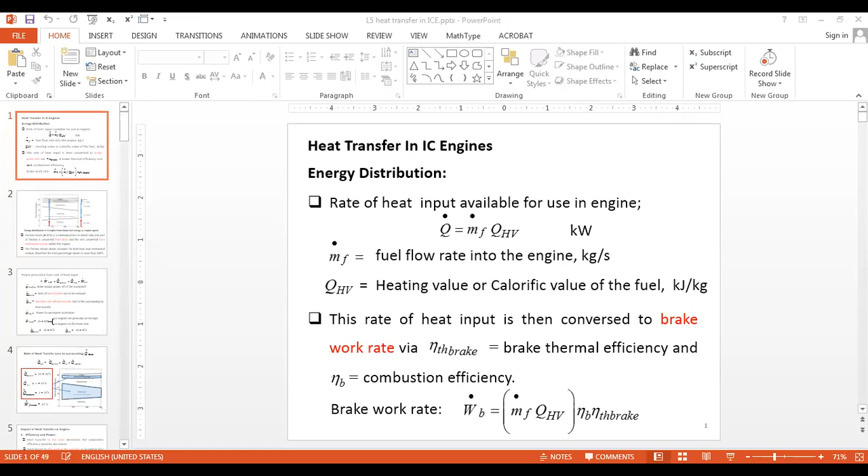Okay, so we start the recording. Today we are going to talk about heat transfer in internal combustion engines. We already talked about combustion and the cycles, so in terms of improving the efficiency or performance of the engines, we have to find out how and where the heat is transferred throughout the engine.

Let's first look at the energy distributions. The input comes from the heat - the amount of heat available for use in the engine comes from the mass flow rate of the fuel times the heating value or calorific value of the fuel. This is the amount of input heat, and this heat will be distributed throughout the internal combustion engine.

The first thing is this heat will convert into the brake work rate or brake output rate, using the brake thermal efficiency. So the first amount goes to the brake work rate. How do we know? We know it from the brake thermal efficiency and also the combustion efficiency.

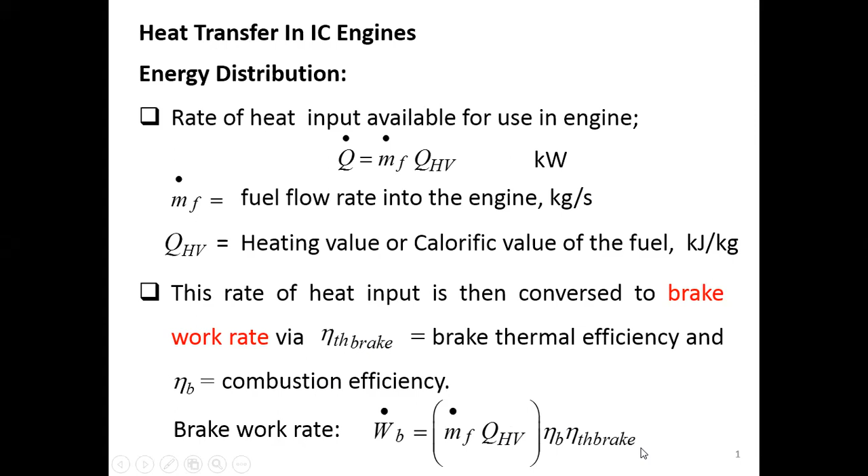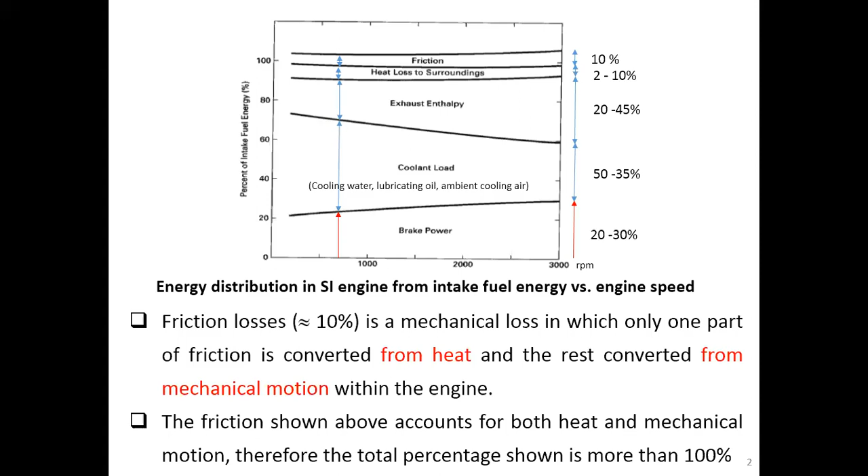And also we have the power, we have to contribute some of the power to run the engine accessories. So if we look at this kind of picture, the shaft work that we receive will be 25 to 40%, in which for the CI engine, the number goes usually high. For the SI engine, it usually goes on the lower end. For the exhaust, it's going to be about 20 to 45%, and to the surroundings, about 10 to 35%.

Let's look in more detail about the rate of heat transfer loss to the surrounding. We have the coolant loss, because later on it has to go out to the surrounding. We have the lubrication oil, the heat that transfers to the lubrication oil or the engine oil, which later on goes to the surrounding. We also have the ambient heat that directly goes to the surrounding at the beginning. So these are considered all the losses here.

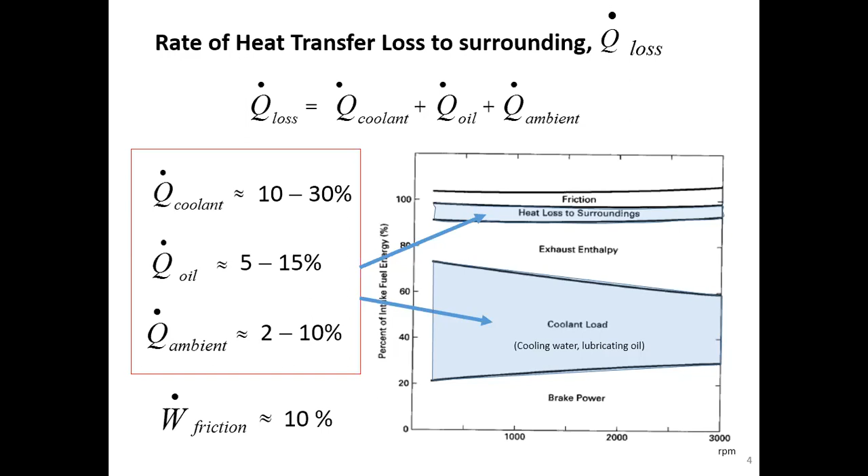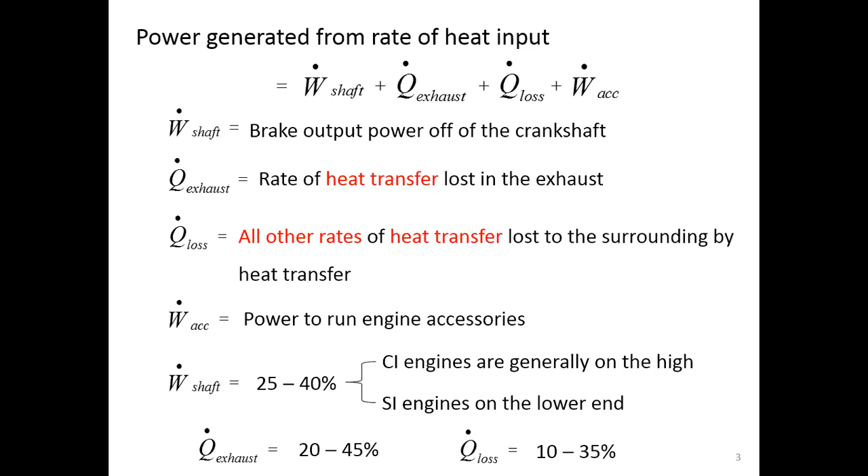This is what they mean by this definition, by these expressions. If they want to take into account all of the heat that transfers to the coolant, to the surrounding, to the exhaust, all of this is considered to be the heat that we cannot use. It has to be taken out from the engine, so we can call it overall the heat loss. So it depends on how you look at it, how the energy is distributed from the heat throughout the internal combustion engine.

Since we have the heat transfer on the engines, let's look at the impact that the heat transfer has on the engine. The first one is the impact on the efficiency and on the power. The heat transfer that happens in the intake manifold, where our mixture flows before it gets into the cylinder, if we happen to have heat transfer in these regions, it will decrease the volumetric efficiency.

Because the heat gets into the intake manifold, flows into the intake manifold, so the mixture receives the heat. What happens to the mixture? The density of the mixture decreases. And when the density decreases, it means the volume gets bigger. So with the same amount of mass, it occupies more volume because the density decreases. So this is what happens if you have the heat transfer in the intake manifold.

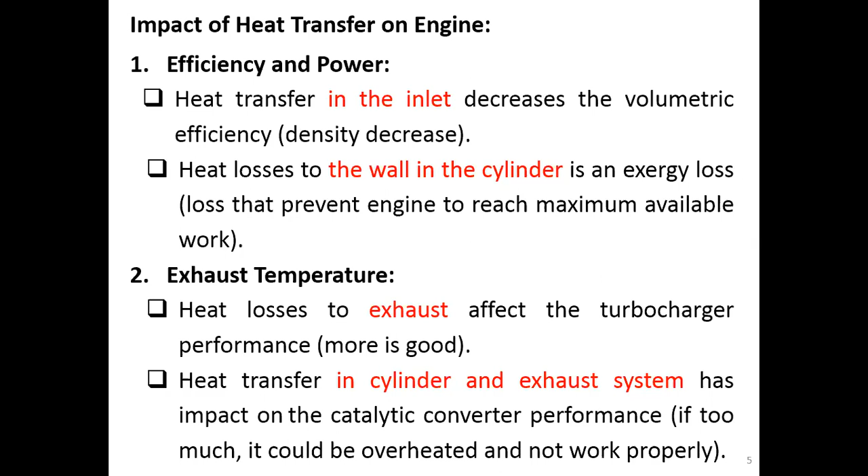Because the performance of the turbocharger is better with that heat loss to the exhaust. If you have more heat transfer in the cylinders and also in the exhaust system, this will have an impact on the catalytic converter performance. The catalytic converter is the device that reduces emissions from the engine—we'll talk about this more in our next lectures. So if you have higher heat, your catalytic converter performance will be bad because the equipment could be overheated and won't work properly.

So this is the impact on the exhaust. Now, how about the impact on friction?

The heat transfer impact on friction: friction due to heat transfer will govern not only the temperature of the liner. The liner is some coating on the cylinder surface, or it may be a sleeve placed on the cylinder surface—it can be either one. So if friction happens because of heat transfer, it will control the temperature of the liner, the piston and ring, and also the oil.

This is what friction does. And when it controls these, it means it will affect the distortions of the piston and bore, because if the piston has high temperature, it can be deformed—we call this deformation a distortion. When distortion happens, sound and vibration come out because the clearance is changed. So friction controls this.

In other words, since this friction due to heat transfer creates thermal loading, this thermal loading—caused by temperature and by distortions—will indirectly determine the power capacity of the fans that blow cool air to cool down the engine. It affects the oil cooler, the power used for the water cooler, and also the pump. So this thermal loading from friction due to heat transfer affects the power of this equipment.

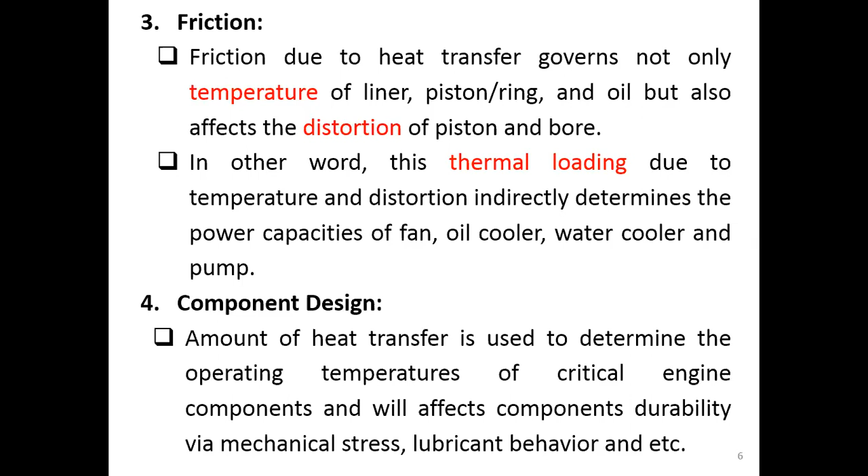Heat transfer also has an impact on mixture preparation in the SI engine, because in the SI engine we mix air and fuel together first. This amount of heat transfer to the fuel will significantly affect fuel evaporation, giving the fuel the ability to mix with air. The amount of heat transfer will also affect cold start calibrations due to cold mixture.

If we have heat transfer go out from the mixture, especially during winter seasons where the outside temperature is lower, our mixture falls in and loses its heat to the surroundings because the surrounding temperature is lower. So this cold mixture, when it falls into the cylinder, is going to affect the start of the engine. So we have to do calibrations that consider this amount of heat transfer when we operate the engine in winter seasons. And then we have to do another calibration when we operate the same engine in the hot season, because the direction of heat transfer is changed between the surrounding and our mixture. So this will affect the mixture preparation for the SI engine.

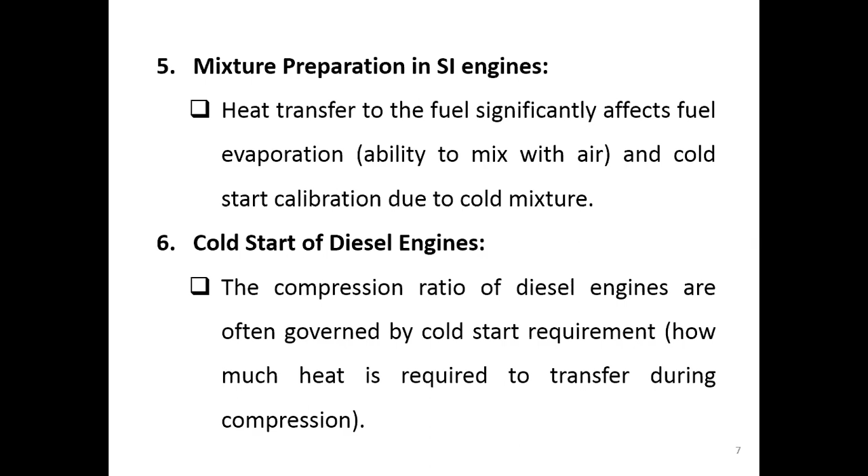Number 7, heat transfer impact on the SI engine octane requirement. The heat transfer will influence the inlet temperature of the air mixture - if it goes in, your inlet air temperature goes up; if it goes out, your inlet air temperature goes down. So it affects this. It also affects the temperature of the combustion chamber, the cylinder head, the liner, the piston, and the valve.

Since it influences all of this, it determines the value of the exhaust gas temperature. Because if the heat transfer goes to this or that, not concentrated on the combustion, the exhaust gas temperature will change. And this will affect the knock, because if you have heat transfer out, less knock might happen. But if you have less heat transfer out, you keep much of the heat in, and if it's too much, your engine can knock from that much heat transfer.

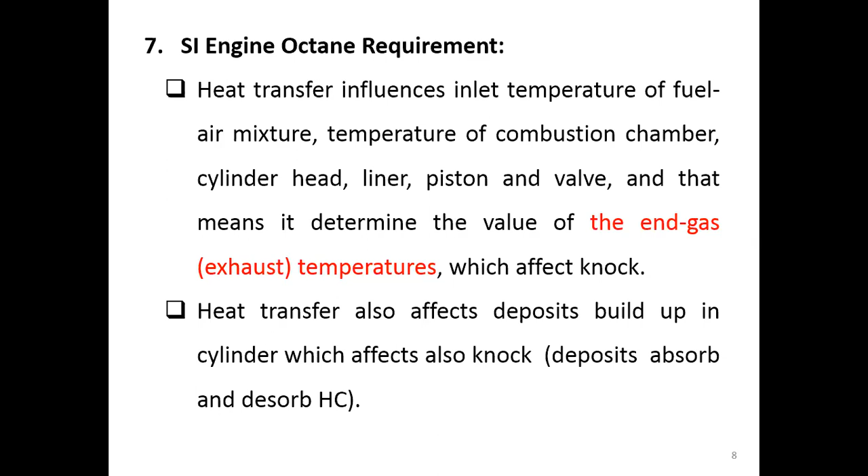So in conclusion, we have mentioned the impact of heat transfer on engines in several aspects. In conclusion, heat transfer is considered to be a very serious problem, and it is something that we cannot avoid. We have to face it.

It happens always, right? Because we need a high temperature to combust the fuel. Our need for high temperature forces us to have heat transfer that we cannot avoid. And also because we want to keep the temperatures at a controllable level in order to operate the engine safely, we cannot have zero heat transfer, and on the other side, we cannot have too much heat transfer. So the amount of heat transfer has to be controlled for the sake of engine operations.

That is why it's important for an engine to have a heat removal process. We have to have a heat removal process even though we want high temperatures, we want to keep the temperatures, so we have to have the heat removal process to maintain the engine at a safe operating condition.

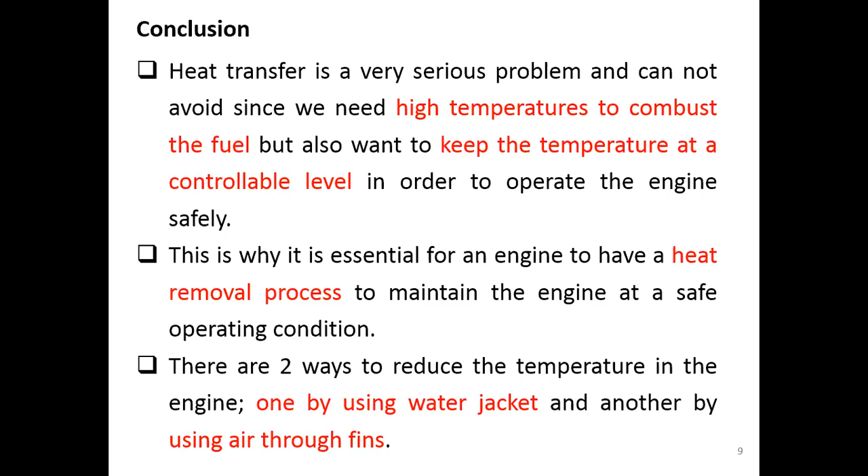Since we deal a lot with heat transfer, and we know how heat transfer impacts our engines, that forces us to study about the heat transfer. So to study the heat transfer, we need to know the heat load characteristics. This is very important. We need to know how our heat load behaves.

The first thing we know is the heat load in the cylinder is very pulsating, that means it's always fluctuating, it never is steady, it's always up and down. Because of what? Because of the temperature difference between the combustion gases and the cylinder wall. Not only because it's different, but also because the magnitude of the difference can go higher than 2000 Kelvin. So this is the source where our heat load is sometimes unpredictable, it's up and down.

The second characteristic is that for different places in the cylinder, this heat load is also different. So it's not only different because it's up and down, but for different locations it's also different. So we have the heat load vary according to places in the cylinder.

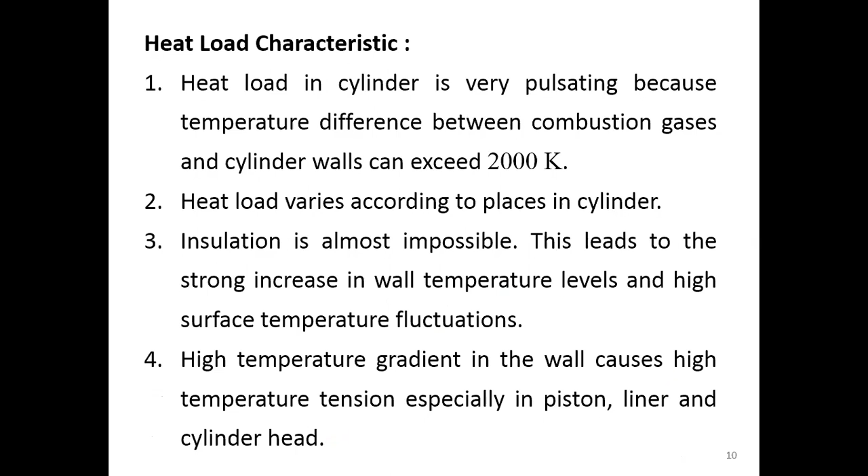Number five, because of this high temperature tension, especially when it happens on the piston, we have this high temperature tension occur in the piston, liner, and cylinder head. Number five talks specifically about the high piston temperature tension. This occurs because the oil temperature for the piston cooling cannot exceed 250 degrees.

We have to allow the piston to have high temperature. Somebody may think, why don't we keep it down? But if we keep it down, the lubrication oil that receives the heat from the piston, its temperature can go higher than 250 degrees Celsius. And what happens if the oil temperature goes higher than 250, trying to make the temperature tension of the piston go low?

What happens is these higher temperatures, above 250, can cause coking of the oil. That means instead of the oil being a fluid, it starts being a solid, or partially the oil becomes solid. So there's no more circulation of the oil. So the oil temperature used for the coolant is limited to 250 degrees Celsius, cannot go higher. So we have to trade off. We cannot make the piston temperature tension go as low as we want, but instead we have to keep it as high as needed so it will not let the oil temperature go up beyond 250 degrees Celsius.

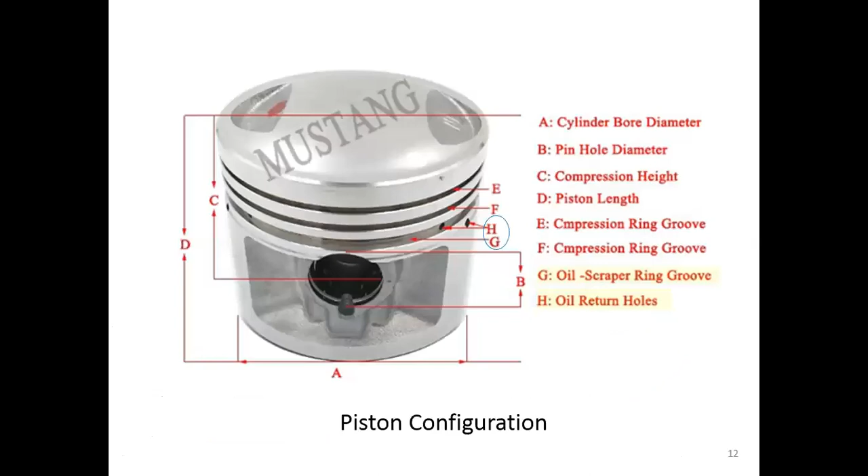Okay, how about the groove? Shown right here. The former one showed the gallery, this one shows the groove. Inside the groove you see the hole, we have two holes here, called the oil return hole. That means the oil, when it gets into the piston, some will go out to the groove using this hole. We also have the oil scraper ring at the bottom of the piston, which is used for scraping the oil to go down. On this side you also see the hole here. So the oil not only comes in and out here, but it also comes out on the groove here, shown like this.

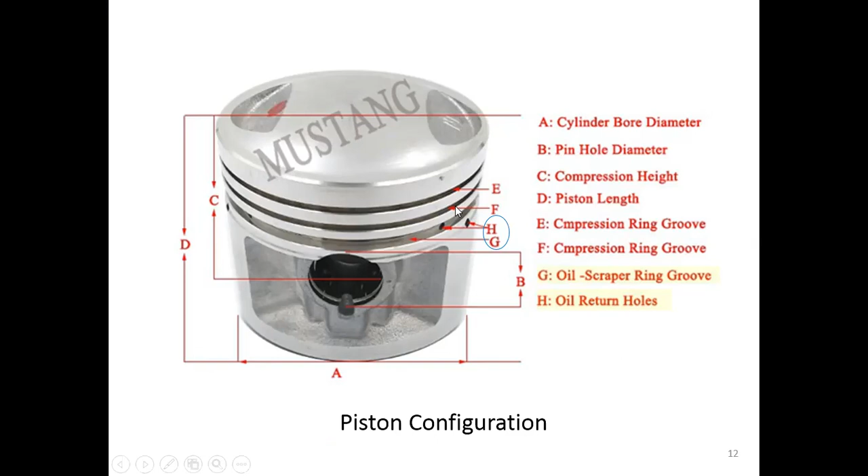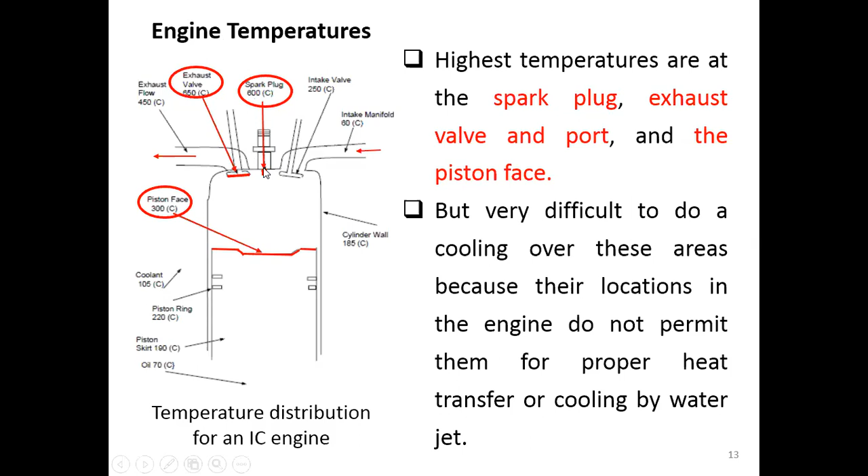Apart from the location problem at all of these places, another problem is time. Time for us to control the heat transfer is also a matter.

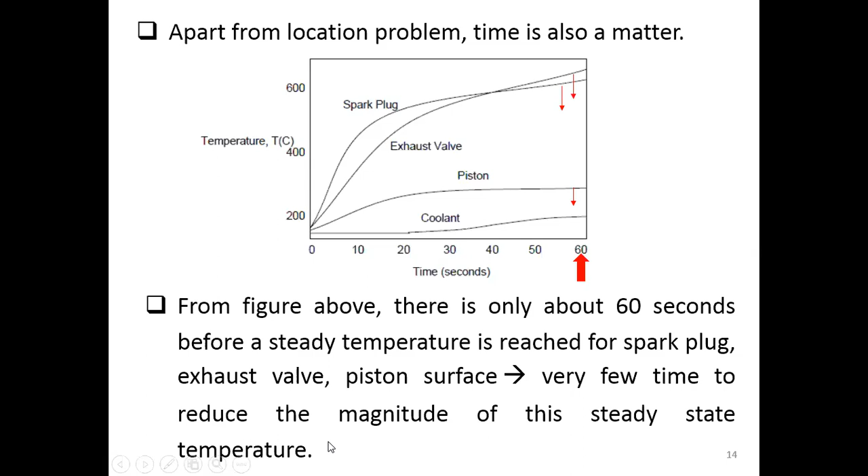So we have very little time to reduce the magnitude of these steady state temperatures, a very short time to do this. So it's a problem - apart from the location problem, we also have the time problem.

Now look at the heat transfer in various locations - the intake system. The intake manifold shows about 60 degrees Celsius in this picture. This temperature is of course higher than the air-fuel mixture temperature, it's hotter than the mixture. Why does the intake manifold have this high temperature? Because it's close to the engine components that are hot, or it's because of the design of the manifold itself, which would make it have a temperature higher than the air-fuel mixture.

So the intake manifold, due to its higher temperature, can help heat the air-fuel mixture, so the mixture can be easily vaporized once it enters the combustion chamber. So here, we intend to have heat transfer from the intake manifold to the air-fuel mixture, so it vaporizes easily and can mix well.

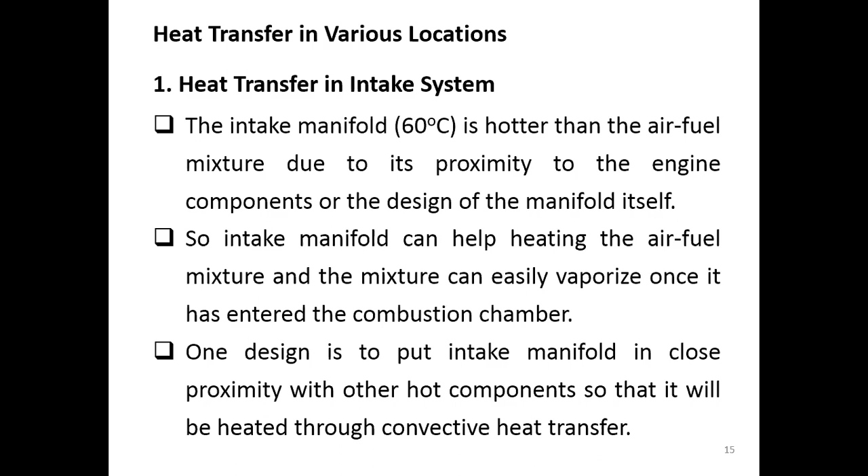So to achieve this, one design is to put the intake manifold in close proximity with other hot components so that it will be heated. The intake manifold itself can be heated through convective heat transfer - just put it close to the hot components and let convection transfer heat to the intake manifold, and then the intake manifold transfers heat to the air-fuel mixture.

Another design is to heat the manifold directly, not only depending on the convective heat transfer mode. This way, they heat the intake manifold directly using electricity or hot coolants. After the manifold is heated, the air fuel mixture that flows into the intake manifold is heated as well through convective heat transfer.

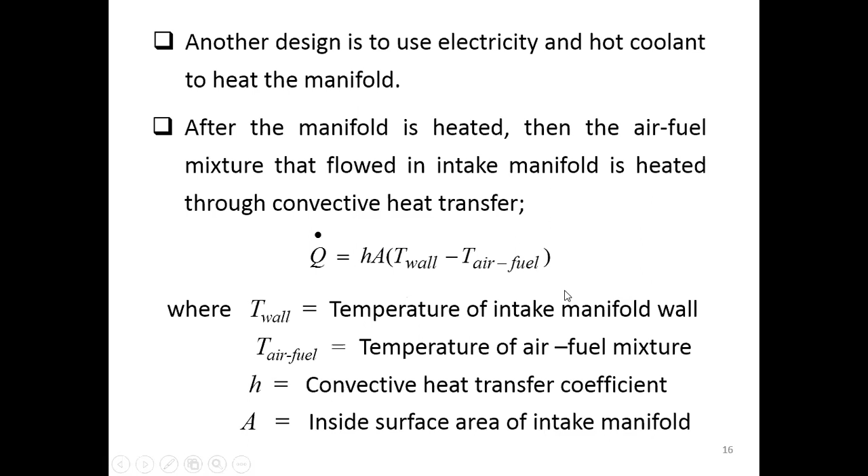The amount of heat transferred can be calculated from this equation. H stands for the convective heat transfer coefficient, A is the surface area—it has to be the inside surface area of the intake manifold. We have the temperature of the wall, meaning the intake manifold wall, and the temperature of the air fuel mixture. So the amount of heat that transfers from the intake manifold to the air fuel mixture can be calculated based on this—it is the convective amount of heat transfer.

As we mentioned, heat helps the fuel to vaporize faster, and since it vaporizes faster, there is more time for the air and fuel to mix together. So it helps provide a homogeneous mixture, which will be ready for combustion in the combustion chamber.

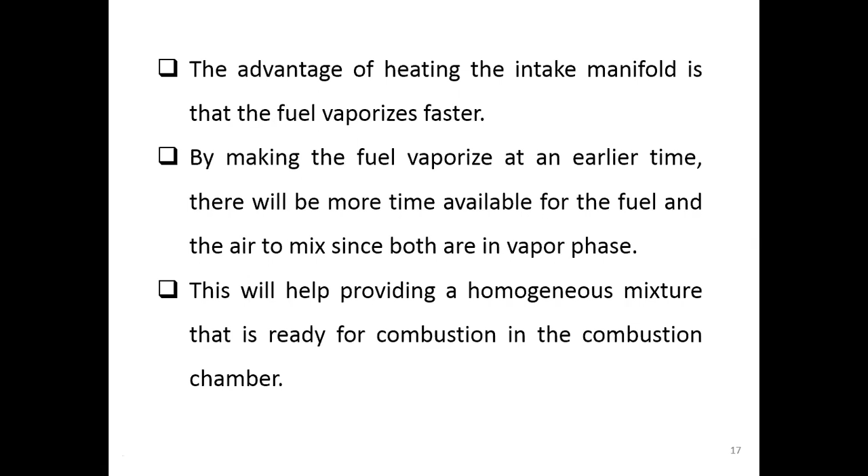The second location is the heat transfer in the combustion chamber. The heat transfer in the combustion chamber or cylinder involves all three modes of heat transfer: conduction, convection, and radiation. All three of these modes play an important role in the heat transfer characteristics for the combustion process.

Let's look at where the heat transfer happens in the combustion chamber. The first one happens during the intake stroke. In the intake stroke, the air fuel mix is cooler than the cylinder wall. The air fuel mixture, when entering the cylinder inside the combustion chamber, is cooler than the cylinder wall, so we have heat transfer from the wall to the mixture.

This heat will help vaporize all the fuel, in addition to the help already provided by the intake manifold. This heat comes out from the wall to vaporize the fuel. Because the fuel vaporization draws heat from the cylinder wall, the wall itself gets what we call evaporative cooling, and this will lower the amount of heat in the compression stroke—the heat due to compression. Some of that heat will transfer out from the mixture to the wall, and in addition, the cylinder wall is also cooled down because there is heat transfer from the wall to the air mixture as the fuel mixture vaporizes.

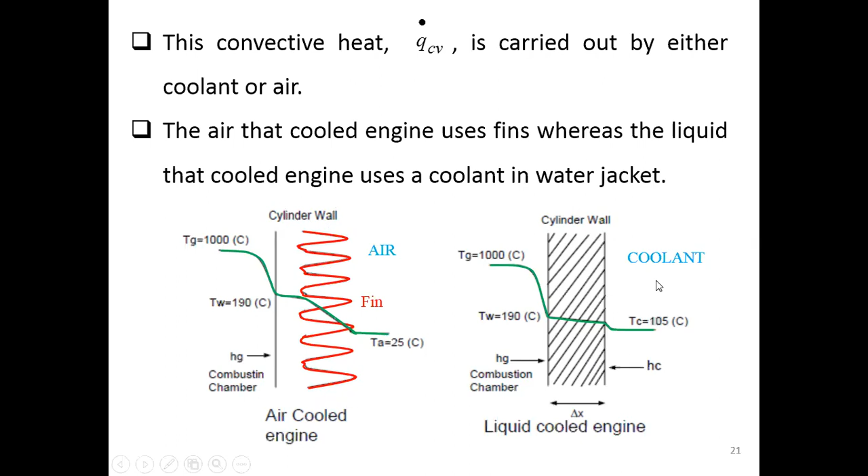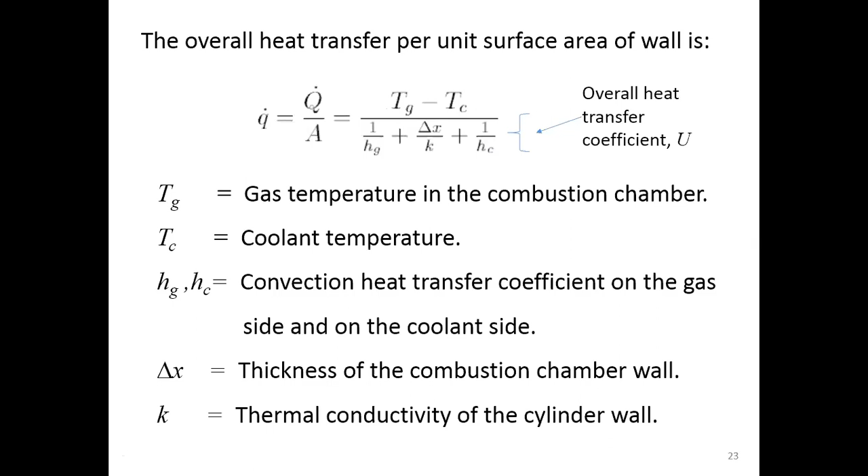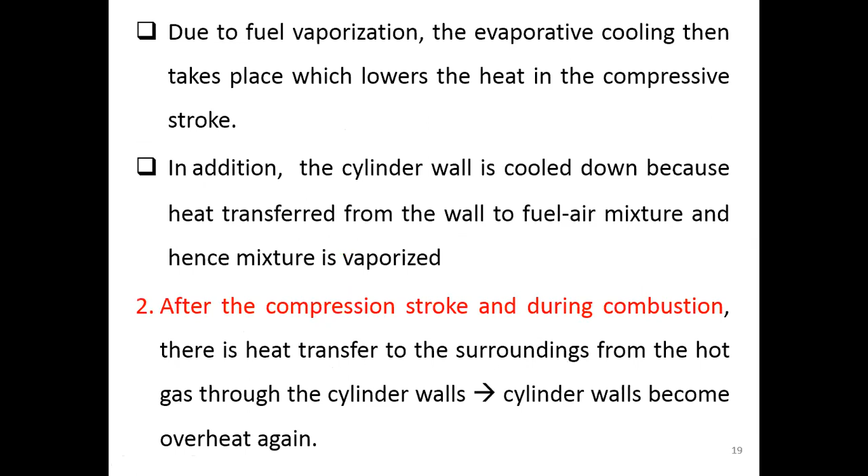So if you want to calculate this, you have to find the temperature of the wall. But if you want the overall heat transfer, you find the temperature of the gas and the temperature of the coolant. You see the difference? You see why we have overall heat transfer? Because with overall heat transfer, you only measure the temperature of the gas and the temperature of the coolant, both falling in and out. But if you don't use overall heat transfer, you have to find the temperature of the wall.

So this wall temperature should not exceed 180 to 200 degrees Celsius. Why do we have to keep this wall temperature within this range? Because we want to make sure our wall has thermal stability, meaning the structural strength of the wall is maintained. This thermal stability also has to happen to the lubrication oil. So that's the reason why the wall temperature should not go over 180 to 200 degrees Celsius. If it's more than this, what happens to our lubrication oil? Remember?

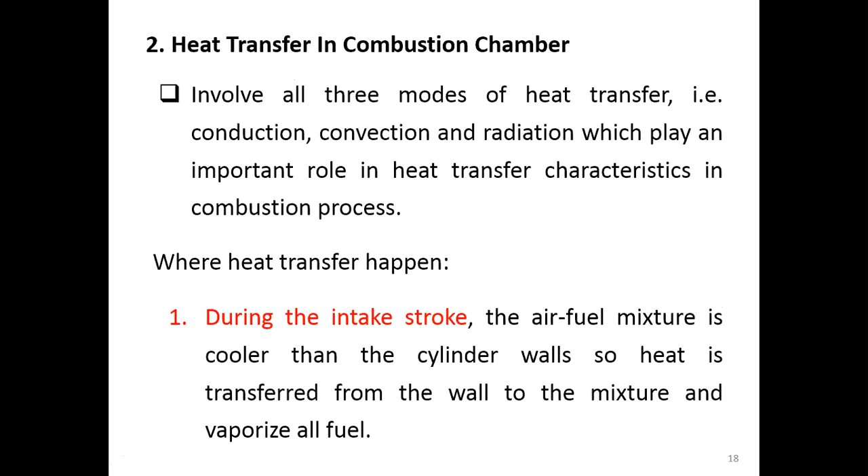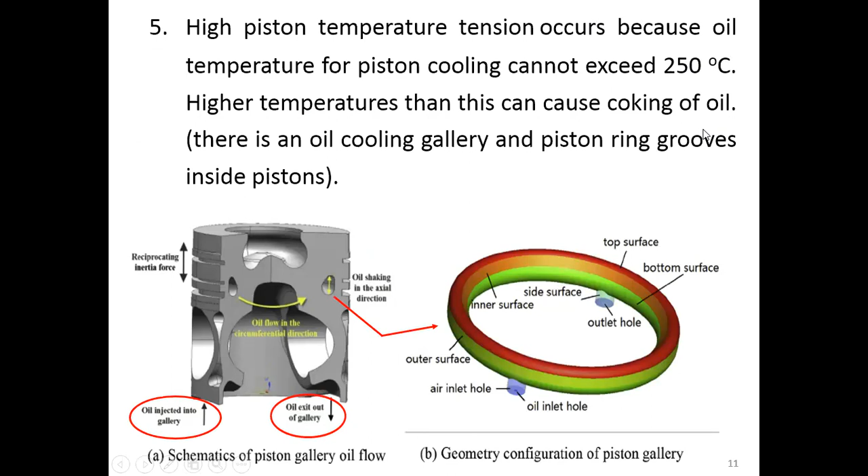250, right? If our oil has a temperature more than 250, it becomes coking. So this is why the wall temperature should be kept within this range.

Since this amount of heat requires calculation of the heat transfer coefficient - the coefficient of heat transfer due to convection - how can we come up with this heat transfer coefficient? We have to make use of the Reynolds number and also the Nusselt number. These two numbers are used for comparing the flow and the heat transfer characteristics. Most of you heard about Reynolds number in fluid mechanics. Now you hear about Nusselt number because it involves the flow of the gas and the heat transfer characteristics. These two numbers help us compare flow and heat transfer characteristics for different sizes, speeds, and geometries of the engine.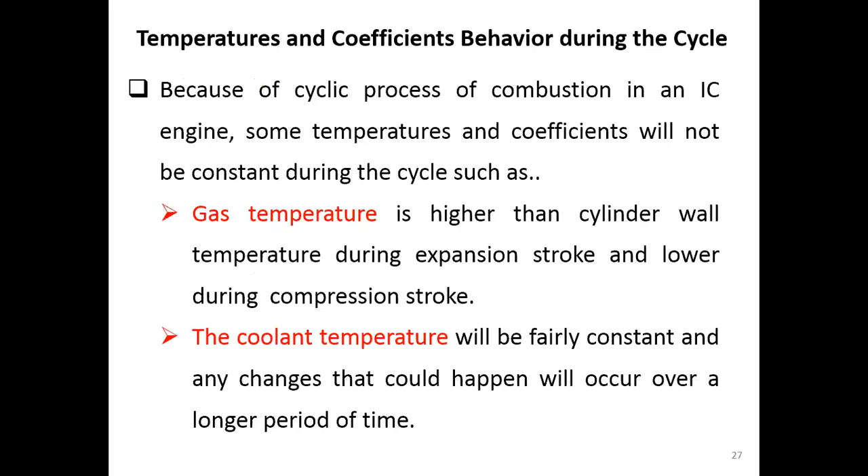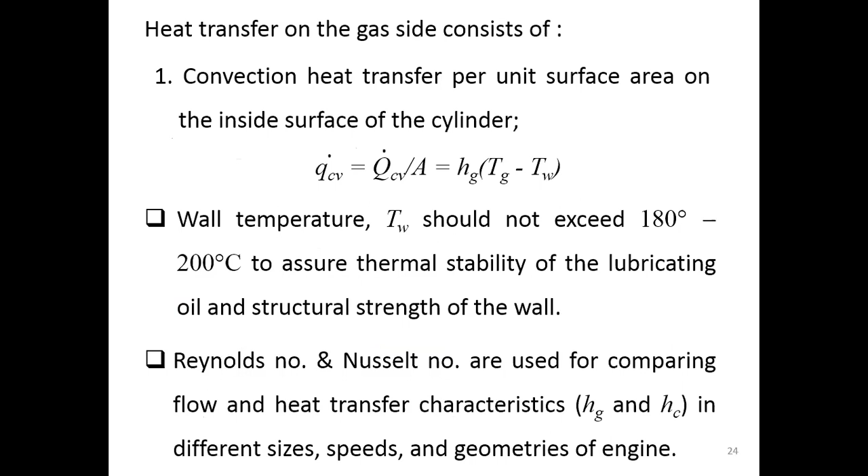Otherwise, we will experience what? Remember, the structural strength of the wall will be loose - we will lose the structural strength of the wall. So we will keep the cylinder wall temperature constant.

So this is the problem we face when we do the heat transfer analysis. One fluid, the gas inside, changes. Another fluid, the coolant outside, is constant. The wall is constant. So the heat transfer has to happen under these conditions. Let's look at how the heat transfer behaves during the cycles - there is heat transfer to and from the cylinder wall throughout the 4 strokes of the combustion process.

We have heat transfer happen during the intake stroke here, the cylinder wall is hotter than the fuel, so vaporization of the fuel happens due to convective heat transfer.

During compression, gas becomes warmer than the cylinder wall, so we have heat transfer throughout the wall here.

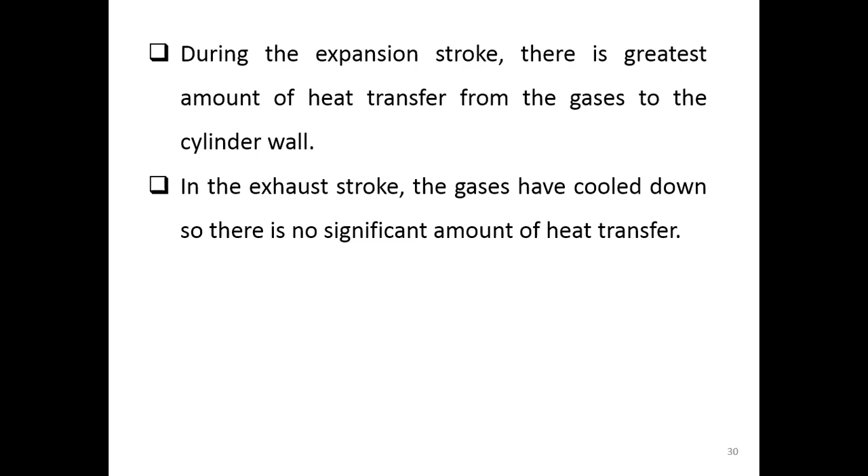During the expansion stroke, there will be a greater amount of heat transfer from the gas to the cylinder wall. In the exhaust stroke, the gas cools down, so there's no significant amount of heat transfer. This is how the heat transfer behaves.

Sometimes we have heat go through the cylinder wall from the gas. Sometimes we have heat from the cylinder wall to the gas. It goes back and forth like this during the cycle.

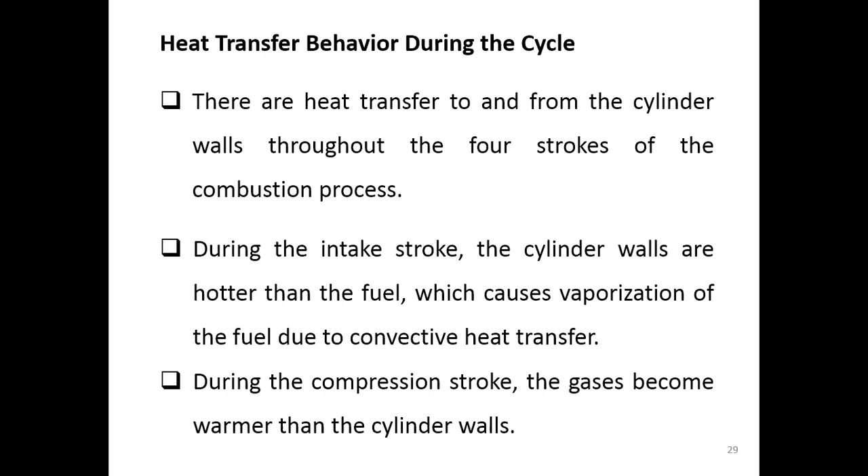And imagine we don't have just one cycle. We have thousands of cycles that happen when our engine operates. So the heat goes in and out all the time. That means, if you look at the cyclic process of combustion, you want to try to determine the heat transfer.

So if we look at the same point, under this weird behavior, in and out, at one particular point, you see heat in, you see heat out, because it's plus minus. So at one particular point, you observe the amount of heat transfer.

The first cycle happens like this line. Then the second cycle comes in, and you see, wow, nearly the same. So at least we see the light, or some way that can ease our calculation, our analysis.

Because at the same point, the heat transfer that we measure is pretty much the same on each cycle. The first cycle shows this much heat transfer, the second cycle shows nearly the same amount. So at the same point, the behavior is the same, no matter what cycle it is.

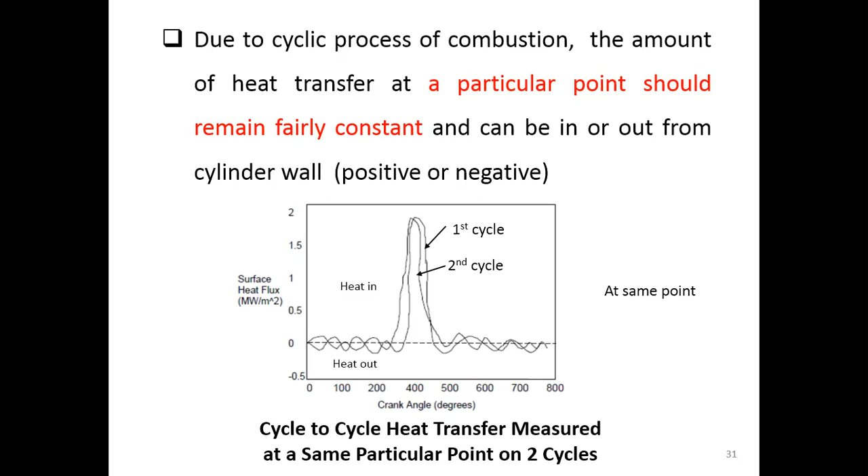But when you look at different points, then you see how difficult it is now. For different points, like the 3 points shown here, you can see that for different locations, it shows different amounts of heat transfer.

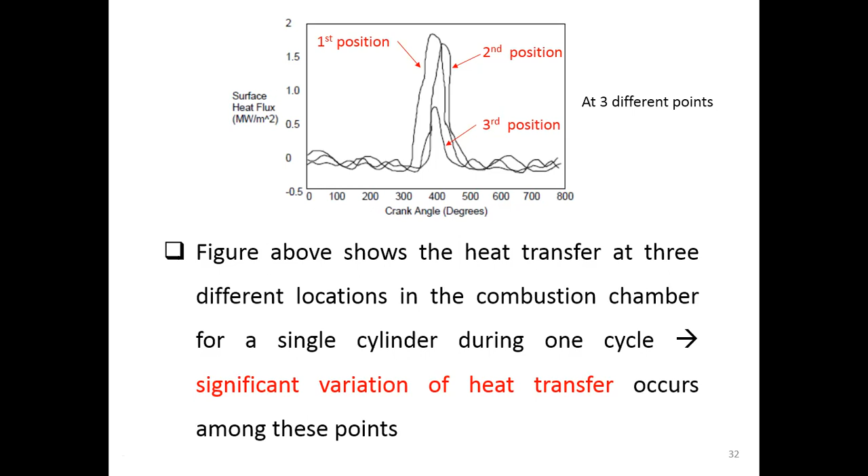So you have a significant variation in the amount of heat transfer that occurs among these points, even though it happened in the same cycle. For different locations, the amount differs, but for the same location on different cycles, it's the same. Okay, so this is the heat transfer behavior during the cycles.

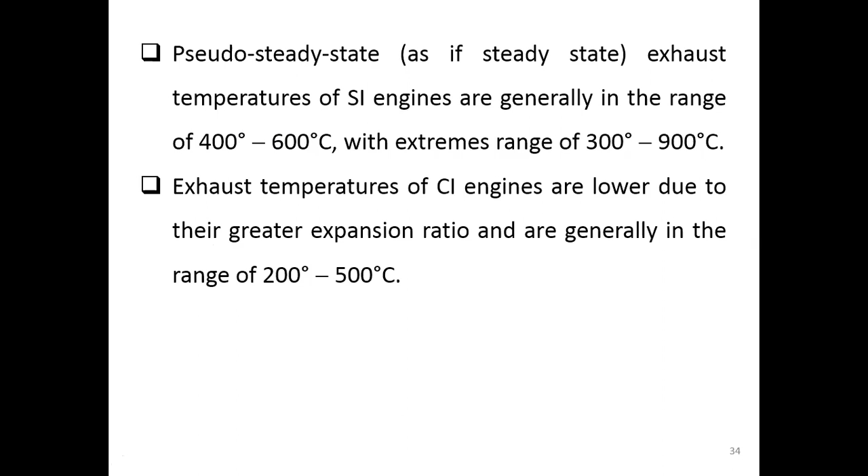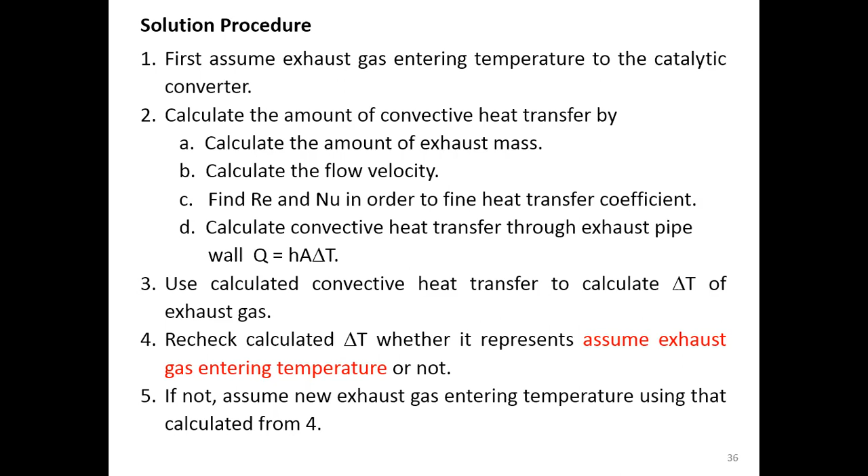With this calculated heat transfer, we use it to calculate the difference of the temperatures of the exhaust gas. By the difference of the exhaust gas temperature received from this equation, we can recheck the calculated delta T here, whether it gives us the assumed exhaust gas entering temperature or not. If not, then we have to repeat our calculation again by assuming new exhaust gas entering temperatures. So this is how we can solve the problem.

So let's first assume the first approximation. Instead of assuming the exhaust gas temperature, we assume the delta T. We assume delta T is equal to 100 Kelvin. That means the entering exhaust gas temperature before getting into the catalytic converter is about 383 degrees Celsius. You see, this is still higher than 200, but lower than 400. So this is our first assumption.

The air property value that we use—we use the approximate exhaust gas temperature here, so the average bulk temperature of the gas. We have two exhaust gas temperatures: leaving the engine, which is 756, plus entering the catalytic converter that we assume, 656. Divided by 2, the sum of these two divided by 2 gets the average bulk temperature of the exhaust gas, which is 433 degrees Celsius.

We use this to find the property of the air, because we assume that our exhaust is the air. So use this temperature to find other properties, such as density, kinematic viscosity, thermal conductivity, specific heat, and also the Prandtl number. You will see later on how we use this Prandtl number.

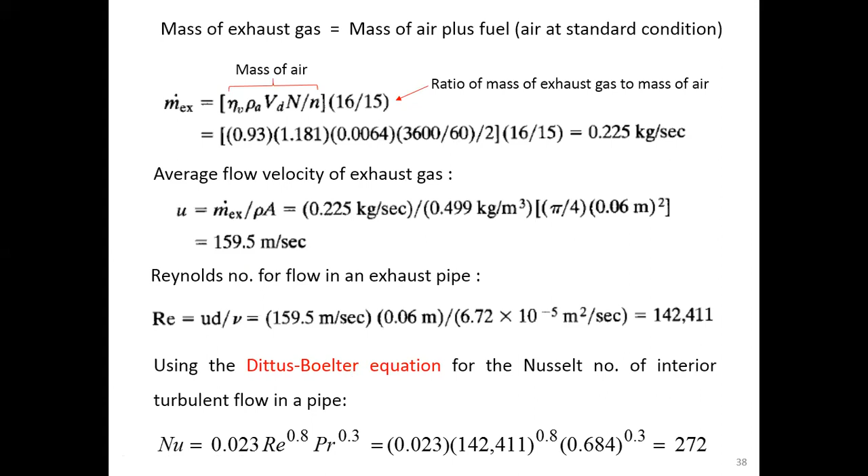The Reynolds number and Prandtl number are already known, so we know the Nusselt number here. The Nusselt equations come from steady flow experiments. Usually the Nusselt number equation is tested under steady flow conditions. So before we apply the Nusselt number to our exhaust flow, we know it's usually 50% higher.

So we make use of that knowledge. We take the Nusselt number we found, 272, and multiply it by 1.5. So our Nusselt number under the pulsed exhaust flow will be 408. We use this 408 to calculate the heat transfer coefficient of the exhaust gas inside our pipe.

When we know this, we can calculate the amount of heat transfer, using the bulk temperatures. We took the average temperature of the exhaust gas leaving the engine and entering the catalytic converter, and the temperature of the wall. So this is the amount of heat convected from the exhaust gas to the pipe wall.

And then we use this amount of heat to calculate the temperature drop in the exhaust flow between the engine and the catalytic converter. And what we found is: delta T, with the same amount of heat divided by the exhaust mass divided by Cp of the exhaust, comes out to be 117 Kelvin.

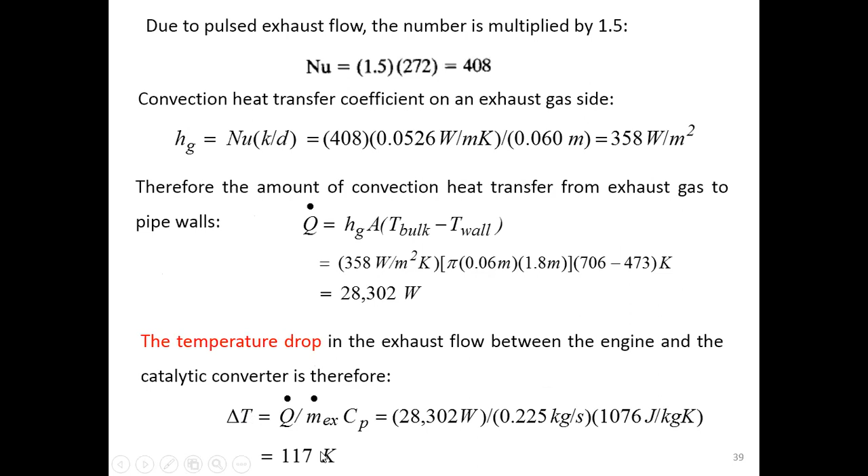Until we come up with a delta T here that is closer to this amount. It depends on how much closer you would like to have, then you can finish. In here, they finish at delta T equal to 112.

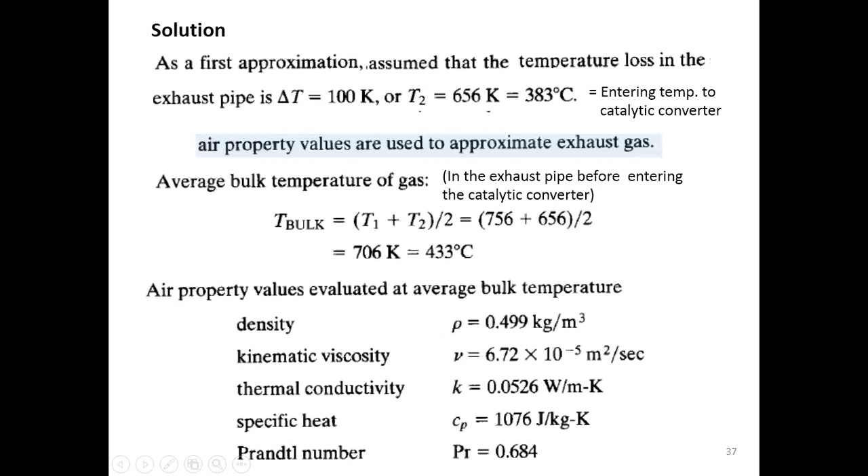And the exhaust gas temperature before entering the catalytic converter will be 371 degrees Celsius, compared with when it leaves the engine, which is 483. So you can see the temperature drop of about 112. And this temperature drop represents the amount of heat transfer from the gas through the pipe wall, the exhaust pipe wall.

Okay, so that is the example. Any questions on this example?

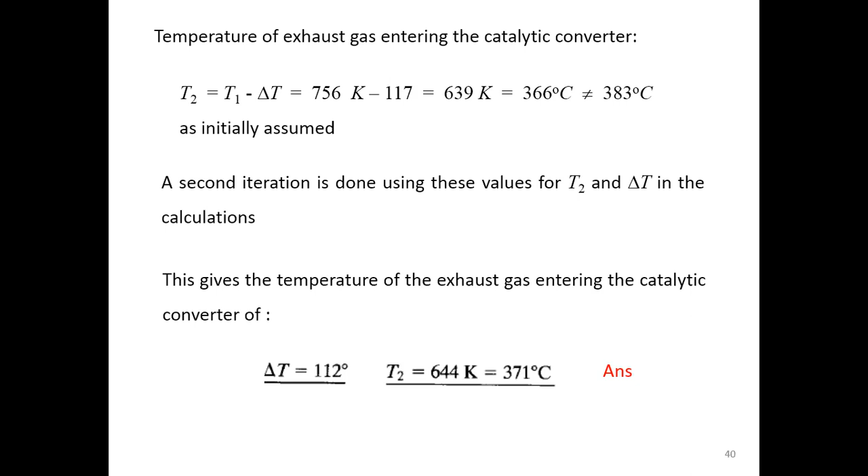Okay, so the next one is the heat transfer to the engine coolant. The heat transfer to the coolant increases with higher engine speed. That means the more the engine speed increases, the more heat transfer we have to the coolant. This happens in order to maintain the steady state temperature.

And the amount of heat that transfers to the coolant can be calculated according to this. We have the convective heat transfer coefficient on the coolant side, H sub C, times the surface area that occupies our coolant, or the surface area of the combustion chamber with the outer surface, and this area is constant. And the coolant temperature, which is also constant, and the wall temperature here that increases with speed. So this is the amount of heat that transfers to the engine coolant.

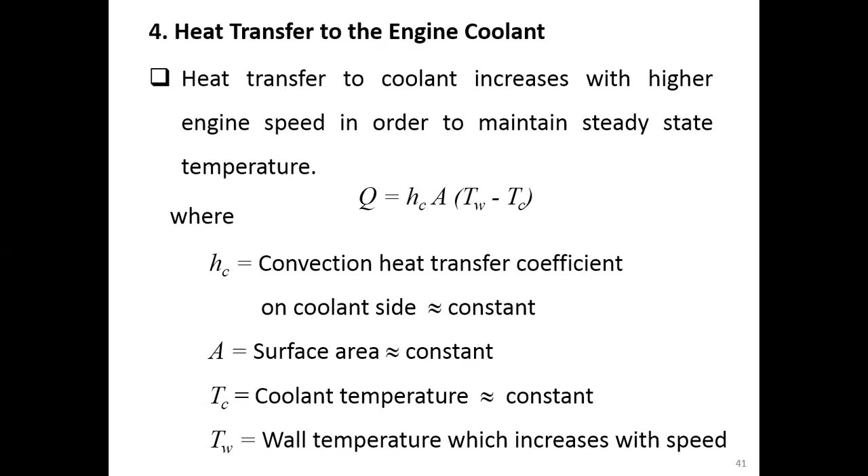Okay, how about the heat transfer in the evaporative cooling? Evaporative cooling occurs because our fuel is vaporized during the intake, and also at the start of the compression.

This evaporative cooling lowers the intake temperatures and raises the intake density. That means it increases the volumetric efficiency of the engine. And since the volumetric efficiency increased, we have better fuel consumption, right?

Especially at high speed. So this happens naturally already. This heat transfer happens naturally when we operate the engines, in evaporative cooling. Now, if we want to increase the amount of evaporative cooling, we can do it by...

injecting water, adding water into the intake system. This water will draw the heat and evaporate. When this water evaporates, the amount of evaporative cooling increases. Some engines do this, especially gas turbine engines.

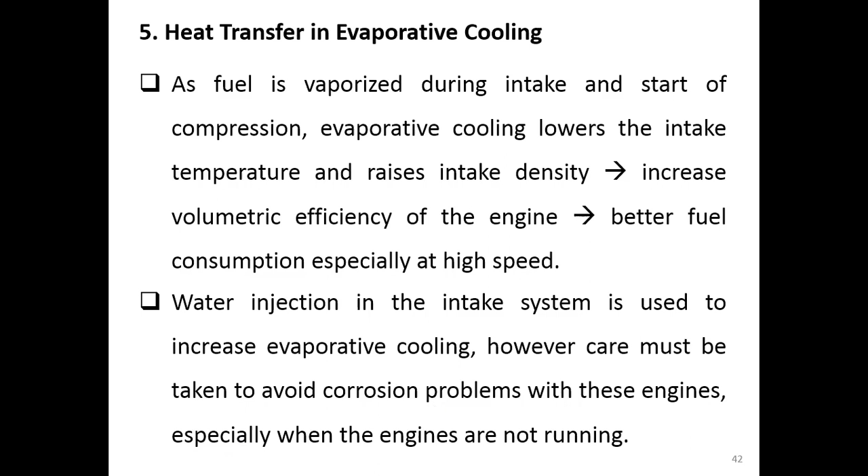Okay, so let's look at the example to calculate the evaporative cooling. We have a large supercharged aircraft engine. Engines in aircraft normally...

use the benefit of evaporative cooling more than our internal combustion engine. So the example talks about the aircraft engine: a large supercharged aircraft engine generates 900 kilowatts at 3,600 RPM when operating with air and gasoline at a fuel-air equivalence ratio of 1.05.

So it's a rich mixture here. After supercharging and fuel additions, air enters the engine with increased temperature of 65 degrees Celsius. See, the air temperature increased due to supercharging here. Gasoline can be approximated as isooctane, C8H18. Calculate how much the air is cooled by evaporative cooling when the fuel is vaporized.

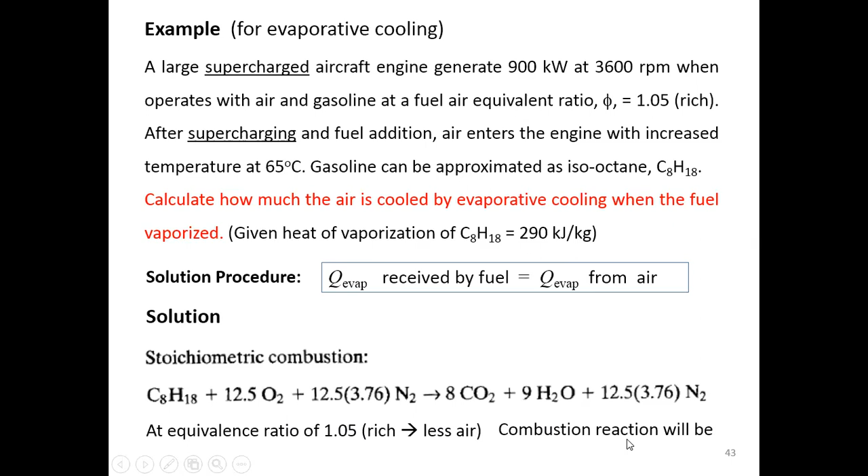Then what we use is 1.05 for the fuel-air equivalence ratio, right? It's rich, less air. So the actual combustion reaction will be: everything on the air side divided by 1.05. And anything involved with oxygen on the product side also has to be divided by 1.05.

Here we have oxygen divided by 1.05. This one has no oxygen. This one has nitrogen, so it's divided by 1.05 also. Or you can do it directly - recombine it, rebalance it directly. Either way is okay, it depends on how you understand the combustion equations.

So when we're done with this, this is our actual combustion equation, and we can get the mass from here - the mass of the fuel, the mass of the air. So the heat received by the fuel is the mass of the fuel, calculated from the number of moles of the fuel times the molecular mass of the fuel, times the heat of vaporization, which is given. The heat that goes out from the air comes from the mass of the air.

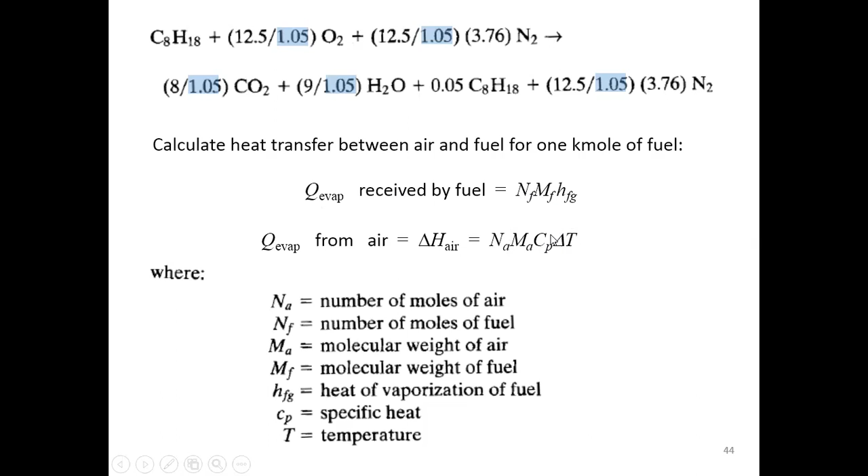The number of moles of the air times the molecular mass of the air times the specific heat, times the temperature difference of the air. We know 1 kilomole, the molecular mass of the air, the heat of vaporization, the molecular mass of the fuel, and the heat of vaporization of the fuel. We know the amount of mass of the air, oxygen plus nitrogen, the molecular mass, the specific heat, and this delta T, meaning the air is cooled down by 20 degrees Celsius. So from 65, it goes down to 45 degrees Celsius because of the air evaporative cooling.

Another example: instead of using just natural evaporative cooling, now they use water injection. They inject water into the engine presented in the previous example. The amount of water injected is 0.25 kilogram of water for each kilogram of fuel used. This means that for every 1 kilogram of fuel used, we inject 0.25 kilogram of water into the engine to do the evaporative cooling.

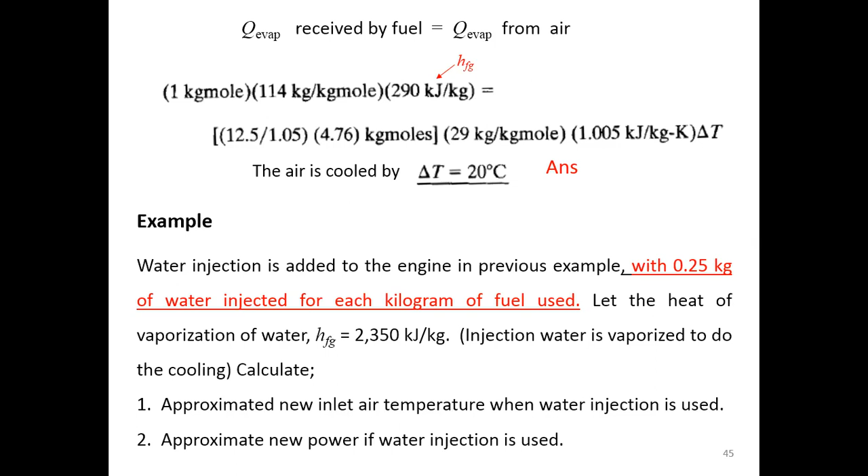Let the heat of vaporization of water equal 2,350 kilojoules per kilogram. Calculate the injected water vaporized to do the cooling, then calculate the approximate new inlet air temperature when water injection is used. Apart from this, they want us to calculate the approximate new power if water injection is used—not only the inlet air temperature, but also the new power received from the engine under water injection.

Look at the previous information: the inlet air temperature is 65 degrees Celsius, and the previous power from the engine is 900 kilowatt. This is if we do nothing and let only the natural evaporative cooling happen. This is the inlet condition and the power we have from the engine.

Let's first solve for the approximate new inlet air temperature. For 1 mole of the fuel, the mass of the fuel will be 114 kilogram. So if you use 114 kilogram of fuel, the mass of water used will be 0.25 times 114, so the mass of water used is 28.5 kilogram.

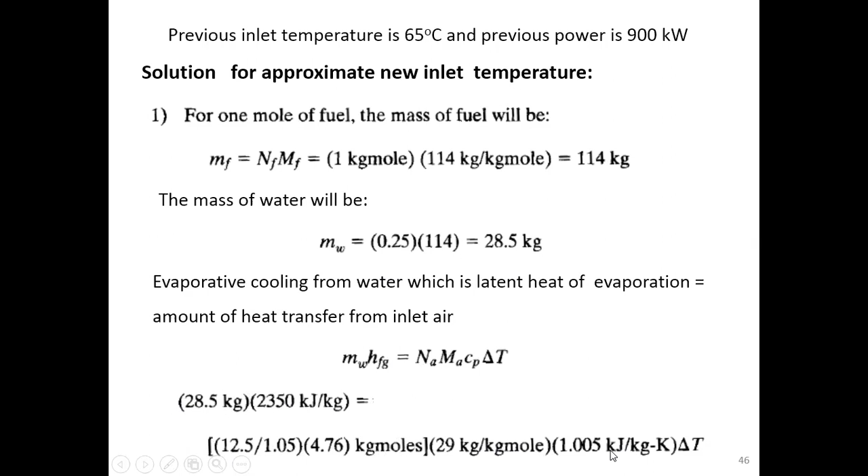The evaporative cooling from the water, which is the latent heat of vaporization, must equal the amount of heat transfer from the inlet air. So the mass of water times the latent heat of vaporization equals the mass of the air times the molecular mass times Cp times delta T. So 28.5 kilogram times 2,350 kilojoule per kilogram, the heat of vaporization for water, equals the mass of air times molecular mass times Cp times delta T. So the new delta T will be higher, 41 degrees Celsius.

So the new entering air temperature after water injection happens will be 65 minus 41, which goes down to 24 degrees Celsius. Much lower. Here, that means the density will be... high, not low, will be high.

So how about the approximate new power? To calculate the approximate new power, we have to go from one step to another, keep going on, like the one I showed you here. You start first with knowing that fuel energy varies with the amount of mass of the fuel, and that means it varies with the power output, because fuel energy is the source of the power output. Fuel energy varies with the mass, and that means it varies with the power output.

But the mass of the fuel varies with the inlet mass of the air because of the air-fuel ratio. That means power output, which depends on the mass of the fuel, varies with the inlet mass of the air, which depends on the inlet air density. And the inlet air density varies with 1 over inlet air temperature. Now we can see the link between the power and the information about the temperature that we have. What we try to do is make the link between the power output and the information we have, because they just want us to find the approximate new power.

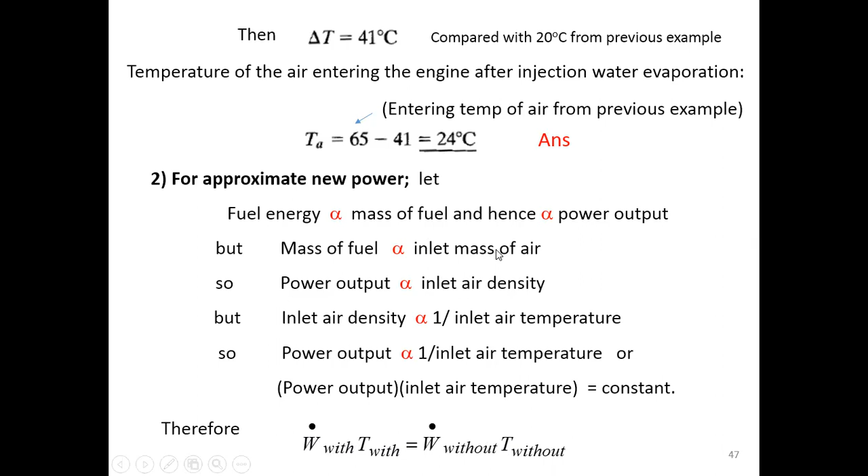So that means power output with water injection times the inlet temperature of the air with water injections equals the power output without water injections times the temperature of the air without water injections, right? This is the relationship we can make use of, working from one to the other until we get this.

So with this, the power output with water injections equals what? 900 times the temperature without water injection, divided by the temperature with water injection. So you can see the power output increased from 900 to 1024 kilowatt. But this is still not our actual approximated power output.

Because with water injections, some of the inlet air is displaced by water vapor, since we inject the water in here. So the amount of air is not as we expect it to be, and this will reduce the 1024 kilowatt output. So that means we get less than this if we consider that some of the inlet air is displaced by the water vapor, right?

So it means we can come up with this expression, exactly the same concept as before: the power output that includes water equals the power output that does not include water, times the number of moles of air when we do not have any water, divided by the number of moles of air when we include the water. So now what we have to find out is this number.

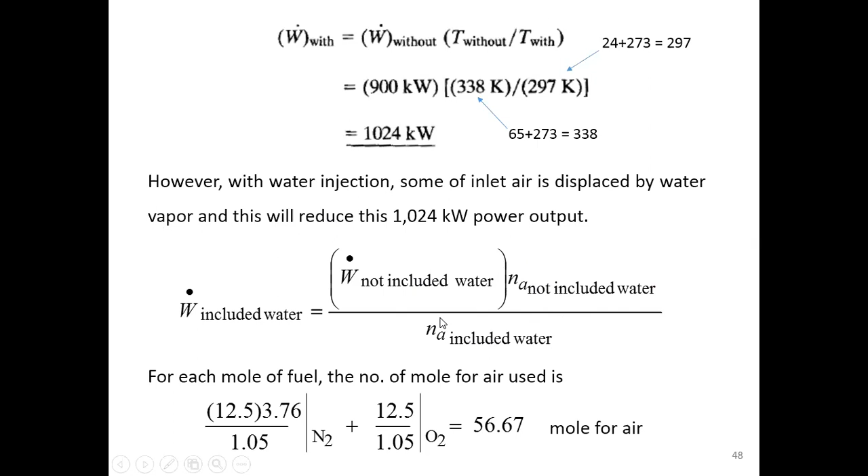So the percentage increase in power due to water injection is 10.7%. This is to calculate more clearly: you think about the same combustion analysis, but in fact you inject water, so the number of moles of air is displaced by that amount of water moles. You have to take that into consideration, and that means you come up with this relationship, which tells us we have to calculate the number of moles of air with no water and the number of moles of air including water, since you have water involved in combustion as well.

And this water, after you use it to create the evaporative cooling, when it gets into combustion it still takes some of the heat out from the combustion. That means the power output is reduced, down to 996 kilowatt.